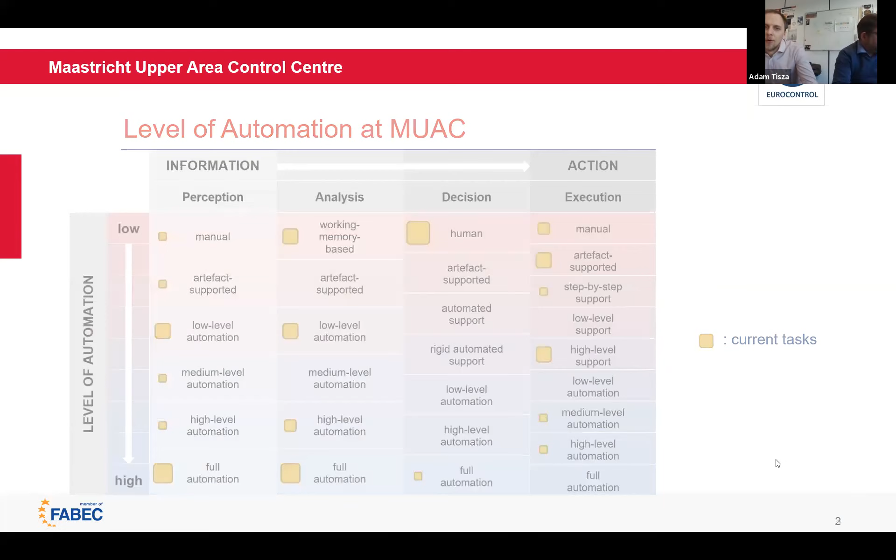So basically there you can see that when it comes to the preparation of decisions, so how we gather information, how we analyze information - think about how the radars work, how the radar plots are represented on the radar view, how conflict detection works. Then you can see that quite many features are there which are highly automated and they support the perception and analysis. However, when it comes to decision making, you can see that we are nowhere near those levels. So that's why the ATCOs say, hey, there's almost nothing that is really automated, because decision making is still completely, almost completely human in ATC.

And then the execution is like a bit more in between. So the next one.

The next question is, how do we want to proceed? We know where we are, where do we want to get to? When thinking about that, you don't want to reinvent the wheel, so you look around at what has happened in other industries. We looked into the flight deck, how features were introduced, how pilot work was automated and the amount of pilots reduced, but also the car industry, because it's very similar. You can see similar things going on right now as car makers introduce more driver assistance systems.

What we realize is that you can follow two different approaches. You can either go a bit blind, without any strategy or systematic approach, and just introduce whatever technology allows you to introduce. That's path A. That's what we quite often see today with cars, and what we could also observe in the flight deck, where automation is completely driven by what can technology offer, what are the possibilities. The problem is that it's not designed to support the human, not designed from a human-centric or system-as-a-whole point of view. It's only technology-centered, and there you can see all the ironies of automation, all the problems and incidents.

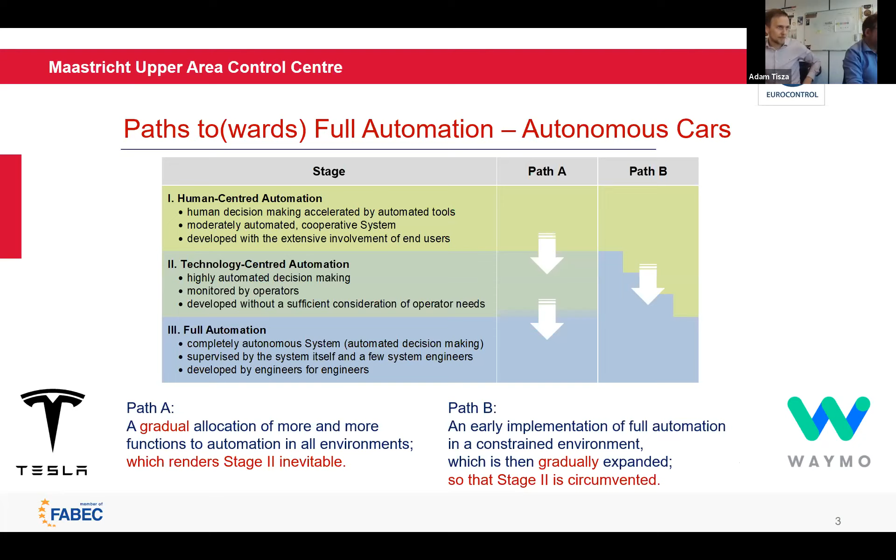So basically, we try to learn from these approaches and apply them to our environment, to ATC. Here is the taxonomy again. We try to define how we can split certain situations, certain scenarios, like the geofenced areas with the cars, in our environment. And we realize we can do something very similar.

If you think about a whole bunch of aircraft in a volume of airspace, you can imagine that not all aircraft are at the same spot at the same time, they don't all interact with each other at the same time. There are certain overflights which are quite often quite segregated. There are some clusters or hotspots, as we often call them, where flights really come together and cross each other's paths, and then you do need to do something about them, and it becomes a complex situation. You can observe these different traffic characteristics within the same airspace, even within the same sector.

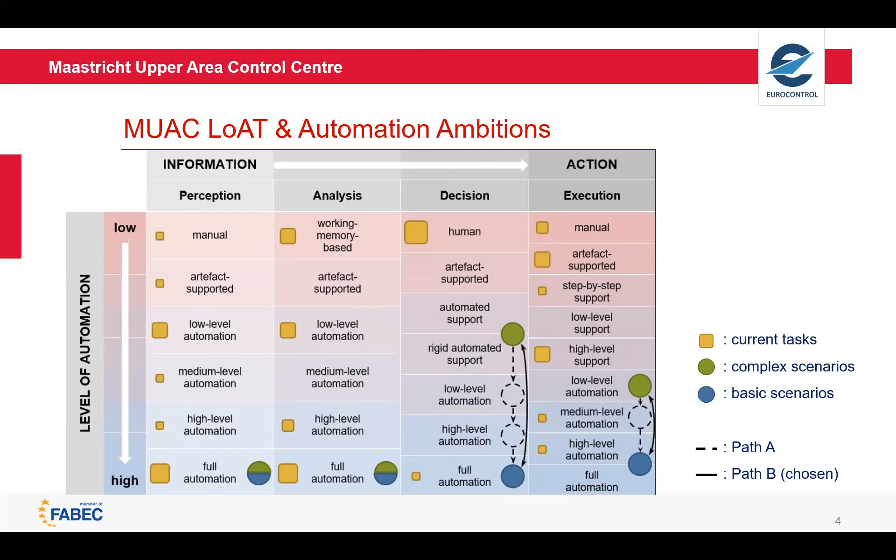We've already observed this happening in the ops room: if you get really busy as an executive controller and you want to focus on your hotspots, on the real challenging complex tasks, you can say to your planner, who usually takes care of coordination and preparation, please help me out - could you take care of those two overflights there? That's of course not going to be lengthy communication in the ops room, so they let each other know very quickly, please take care of those two flights because they are just too much for me, I really want to focus on my core problem. That's what organically developed in the ops room, and that's what we wanted to learn from and surf on as an existing wave.

How about doing the same with automation, where we split basic traffic scenarios and complex traffic scenarios? When it comes to basic scenarios, no-brainer tasks and flights which only pass the airspace mostly on the same level and rarely have any kind of action, we just say let's do it by automation. Let's make sure those flights are taken care of by automation in a way that they don't interact with the more complex traffic of the ATCO.

For the more complex traffic, the green bubbles here, we don't want to go so far with automation. We don't want to create an out-of-the-loop situation. We want to keep the human involved as much as possible, but we do want to support the ATCOs with very high levels of decision-making support. So we want to introduce new intuitive tools which simply show the ATCOs very quickly what the possibilities are, what the constraints are, and then the ATCO is the one who in the end picks the right solution.

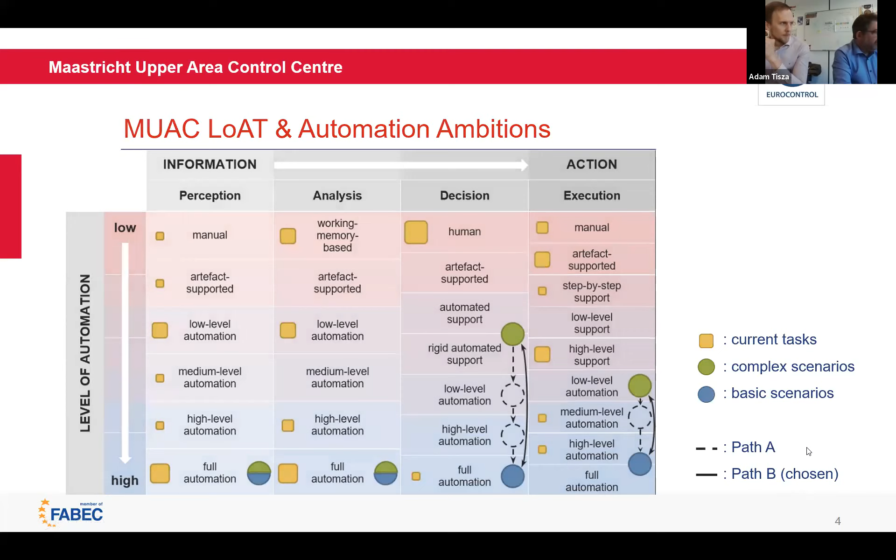So in a nutshell, this is the approach we had. Objective 1 is more about the preparation of traffic, where we would like to achieve very high levels of automation. The other two objectives are that when it comes to complex tactical scenarios, we want to create highly automated decision-making support and execution support tools. But when it comes to basic traffic scenarios, we want to automate the handling of the traffic in those scenarios.

And now the floor is Peter's. Okay.

Beside my job as head of ATM development, I'm also a project manager. I'm a project manager of a project called Argos. The abbreviation was meant to be a real groundbreaking operational system or something, but we invented the name first, and then we said, what can it mean?

The way we approach this project is with the quote that you see here on the screen, as was explained by Adam. We want to let the air traffic controllers really focus on the real challenging work, to do what they are best at, and to leave all the routine work, the basic traffic, to the machine.

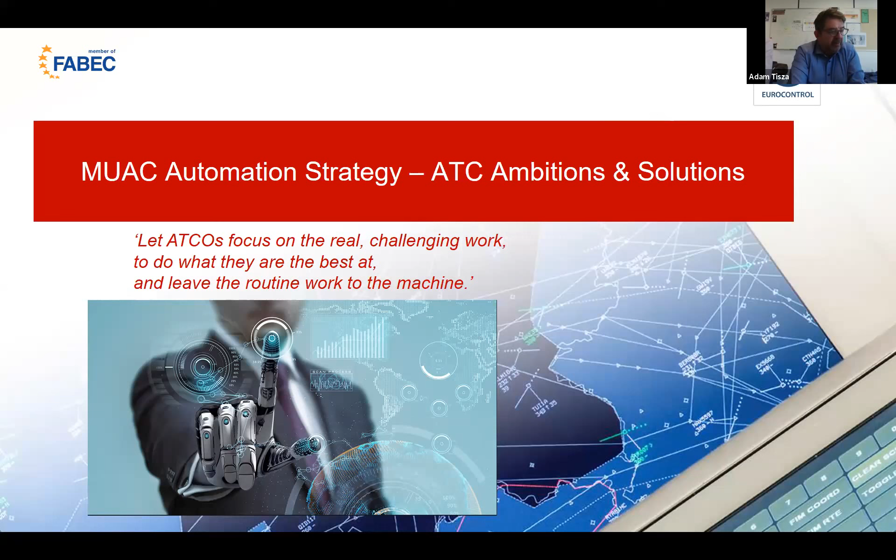Actually, Argos started before the automation strategy was in place, just as an idea that I started working on with my brother, who is one of the software developers here. At dinner once, after a few bottles of wine, we said, let's make a system so that I can do air traffic control at night, because at night we are burning ATCO hours, very expensive ATCO hours, for almost no traffic. So I said, I'll do it. But then I need a system because I don't know how to do ATC.

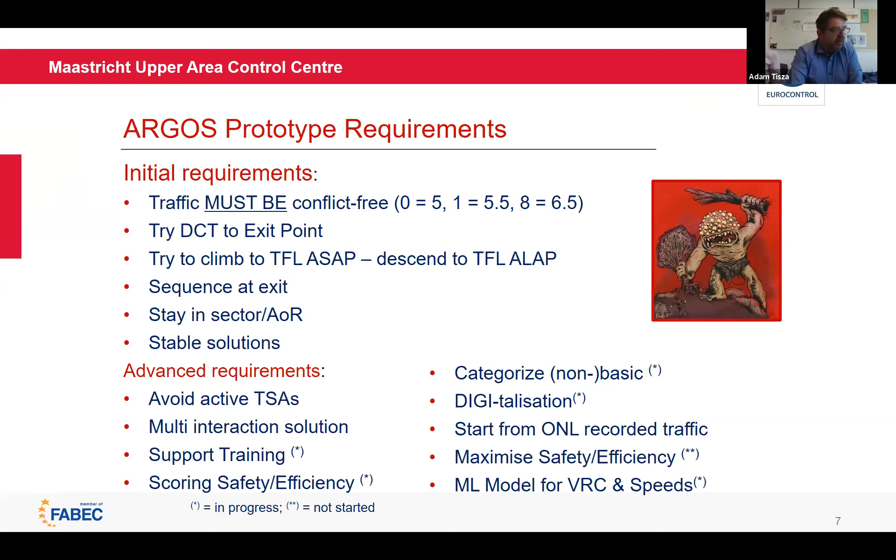In brief, these are the requirements that we put on Argos. The most important requirement, of course, is that the traffic must be conflict-free. You need to respect the exit conditions demanded by the letters of agreement. Of course, you need to avoid military areas, although at night there are not many military areas. Argos is also designed to support training, for example. But I will not dwell on these requirements—this is just what we took on in order to make it work.

What is more important is that when we started designing Argos and talking to the users, we had to define the modus operandi in which Argos would be used in these basic and complex scenarios.

What you see here is that first of all we had level 0 through level 9. Level 0 was that Argos does nothing, and level 9 was that Argos does everything and nobody is around. When we discussed this, we looked into which levels of automation we were going to take, and we selected level 3 and level 8. Level 3 is that for complex traffic, Argos will help—Argos will say, this is what I would do, but it's up to the ATCO to accept what Argos proposes, change it, or modify the plan that is presented.

If it's a CPDLC flight and the plan was approved by the ATCO, Argos will execute the plan. At the right moment, it will give a little warning to the ATCO saying, I'm going to uplink this in 5 seconds, and then Argos will do it. There is no voice involved. If it's a non-CPDLC flight, Argos will have a pop-up saying you should clear this flight as you agreed with my plan before.

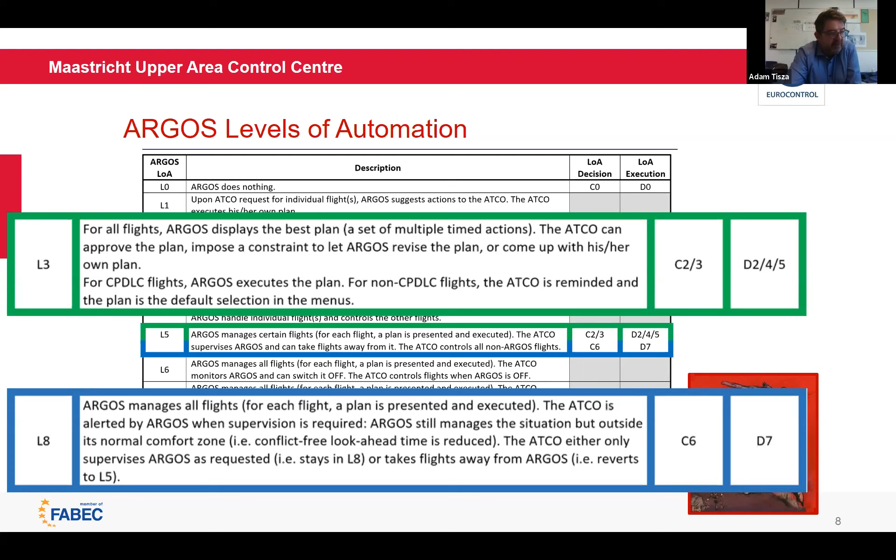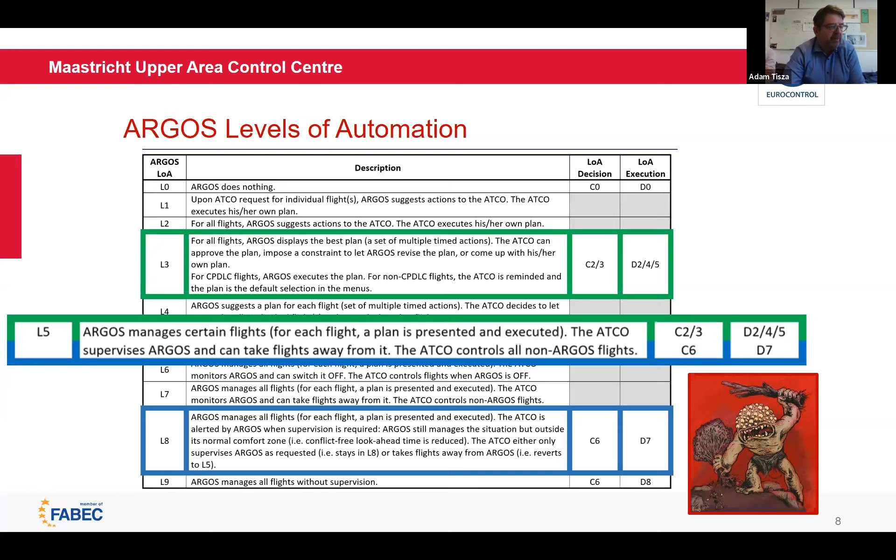We end up, when the ATCO says okay, I'm taking over this flight, imagine there is a loss of CPDLC, which happens. Then the ATCO will say okay, I'll have to handle this flight because I have to do it verbally. And then we're in this mixed mode level between level 3 and level 8, which is level 5, where Argos is managing certain flights, but the ATCO is managing other flights. It's a mixed level. It's going to be maybe the most complex level to develop.

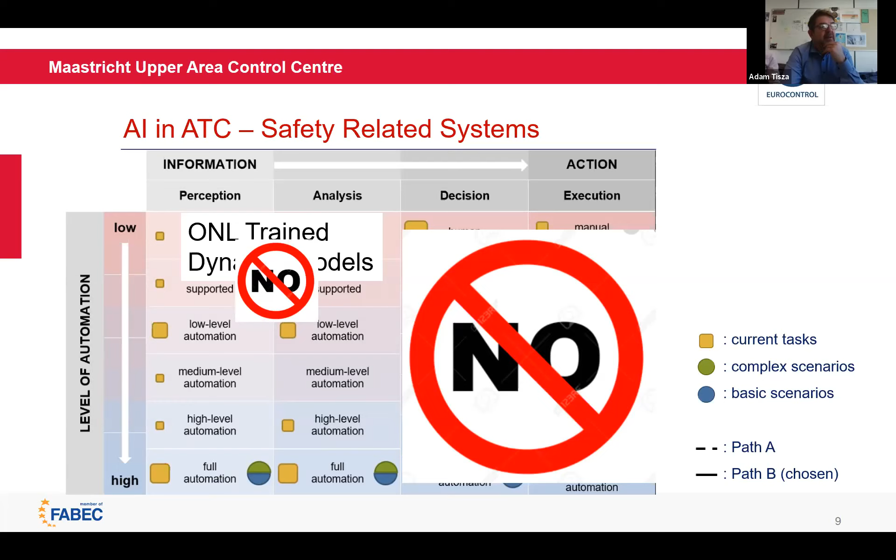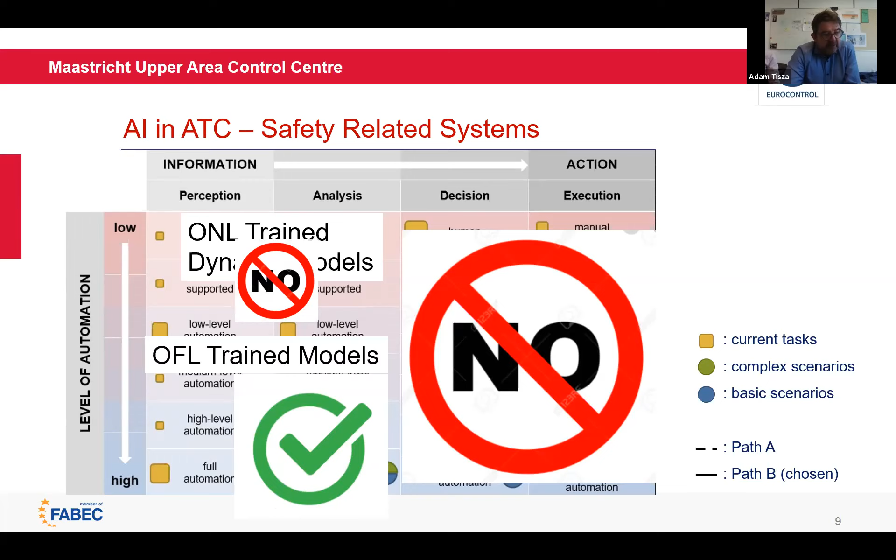In AI, you can have machine learned models that are static while being used, or that are dynamic. You can have a model trained offline, but then the model enhances itself while running online, which is called a dynamic model. Also here we say this is a no-go for safety-related systems. The only thing we are looking at now for artificial intelligence in ATC is an offline trained model that is static. So you train the model offline, you know how it behaves, and then you can use it in the online environment, in real time, but it will not change anymore.

What we have in mind for Argos is that the vertical rate of change and the speed will be derived from a machine learned, offline trained model, and used in Argos to calculate the trajectories more accurately. That model will give the vertical rate of change and speed as a function of the aircraft type, the operator, ADES, temperature, and so on.

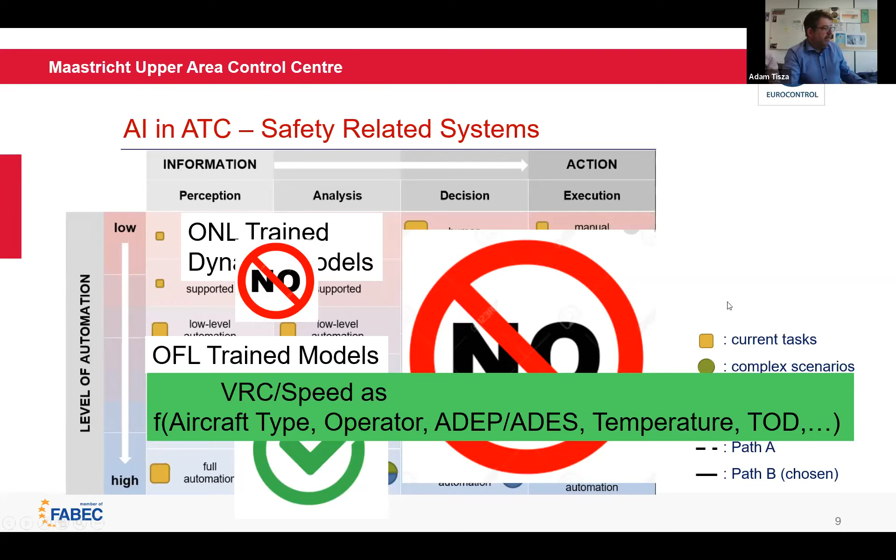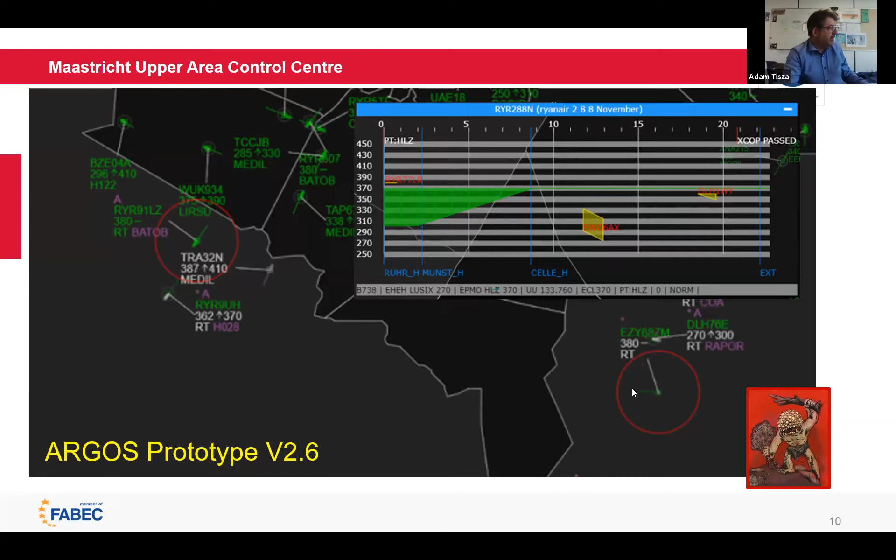A question we often get is, why are you doing this? The main reason is to offload the ATCO work to the computer, so that there is less boring routine work. By doing that, we hope there is less stress, traffic will rise so there is more support but less stress, although the traffic is rising, and that the ATCO can focus on the complex tasks.

Okay, the next bullet is a bit teasing. Maybe we will build a machine at the end that is more performant. We can think about green flights where the sequence of clearances will become so complex because of the engine type or the type of fuel used, which goes beyond the capacity of a human to make the best plan. And there the machine maybe could do a little bit better.

We're also doing it to give more time to the ATCOs to be in the sim. So as I mentioned, they're spending their night being bored. If that time could be used during the day for training special occurrences, that's actually what we think is a better thing to do.

Argos can also do support in training. Today, if you want to train an ATCO, you need a few other ATCOs around him who are feeding that ATCO with the traffic in the right way, and there Argos could take over. We want to be the first in the world doing this kind of thing.

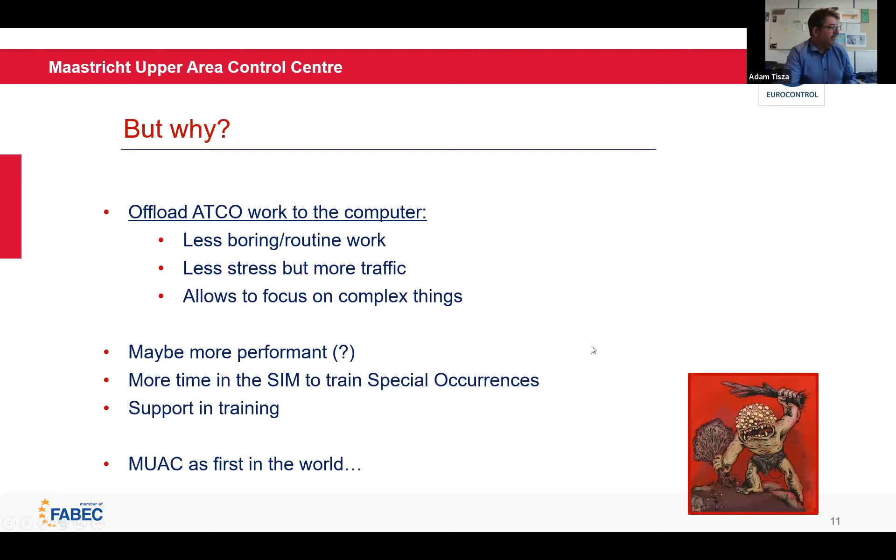How do our ATCOs perceive what we're doing? Actually, quite positive. We have involved the ATCOs from the onset. Automation is, of course, a subject that is being heavily discussed now and happening around us everywhere. As was mentioned, the car industry, automation in cars is affecting all of us. And we clearly tell the ATCOs, this is not a threat for your job.

We have no ambition to build a system that is able to handle complex traffic. We even think we cannot do it today. There are too many unknowns. Well, there are pilots here, there are too many other people in the loop to make this fully automated at this stage. So we don't have that ambition anyway.

In the ATCO refresher training this winter, there is a whole topic dedicated to automation and artificial intelligence. I mentioned COVID here because actually it's one of the few positive things it brought. During COVID, ATCOs who knew we were building this automated system were actually saying, where is it now? Because I'm really bored. We were opening sectors just to make sure people had enough hours on position, but there was no traffic or reason to open those sectors.

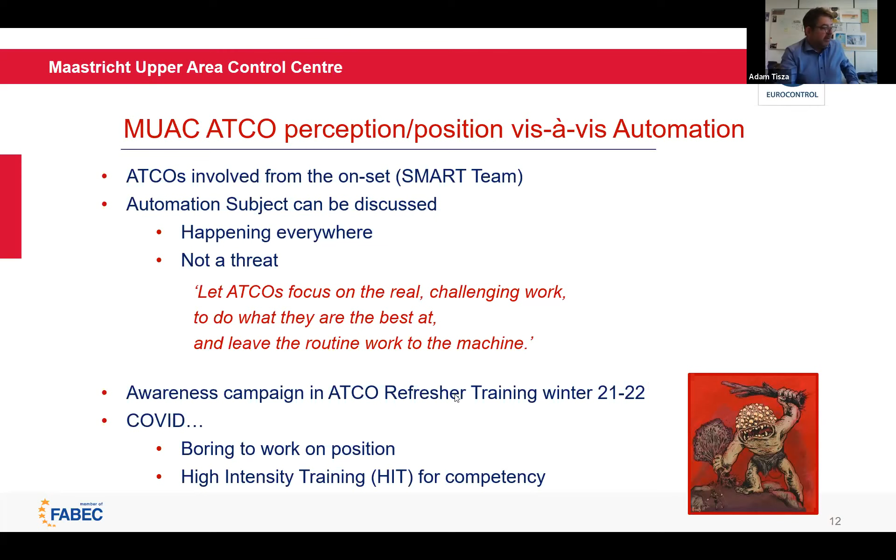Also, during COVID, in order to keep the ATCOs proficient, we actually had high intensity trainings to assure their competency, and this came after we announced Argos. In Argos, when we announced it, we said we want to take away the boring work and give you more training, high intensity training. And then it actually came with COVID by itself, but unfortunately Argos was not yet ready.

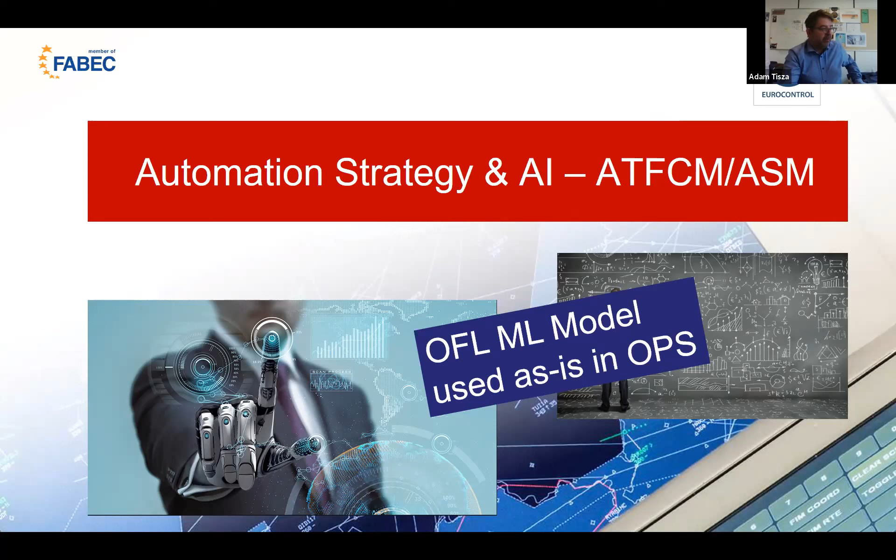Okay, we also use AI in the flow area, so not in ATC but in ATFCM and airspace management. And there again we use offline trained models that are not modifying themselves during operation. I have a few examples of what is currently being used.

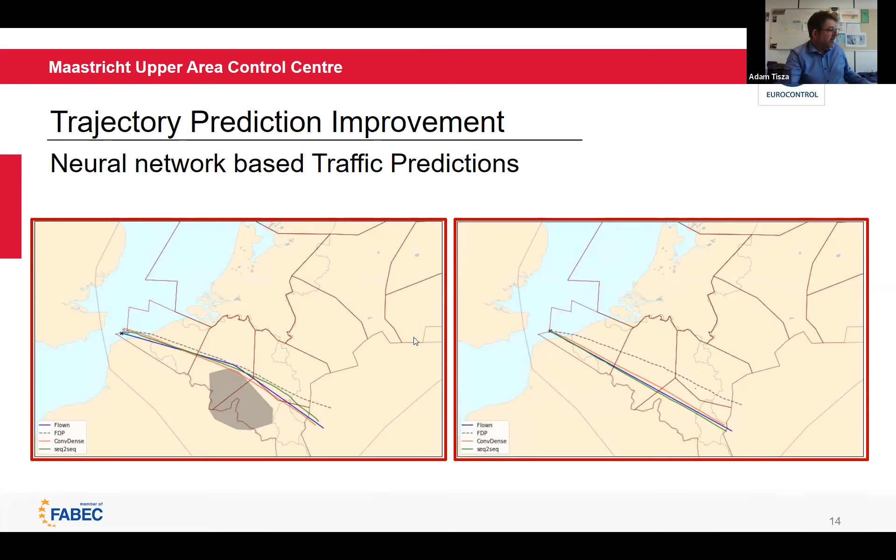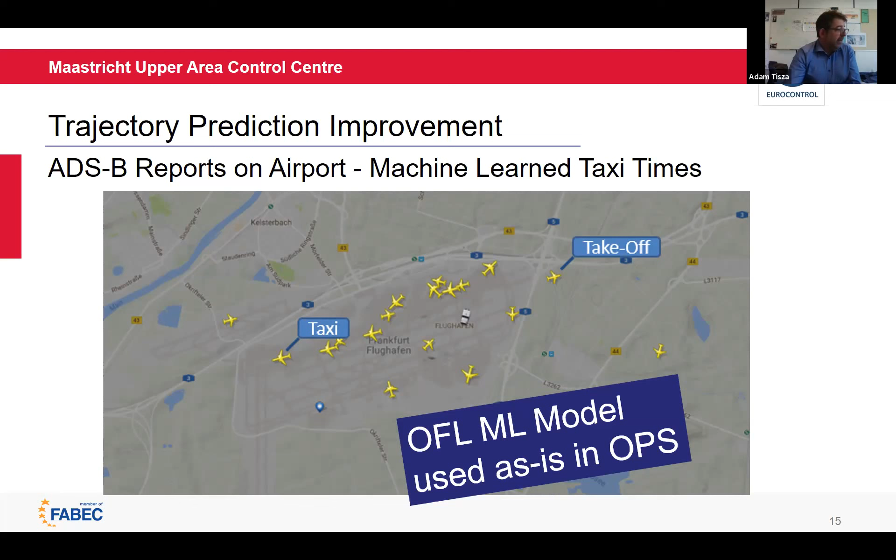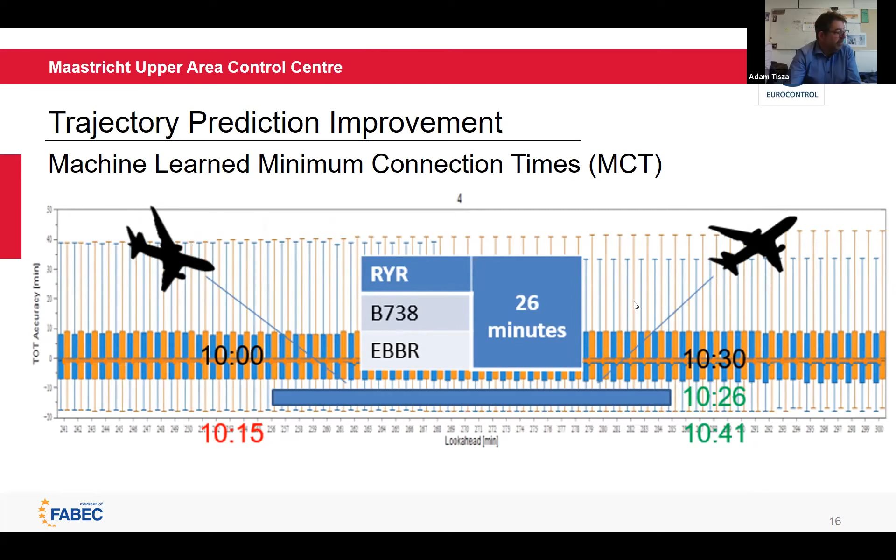Another machine learned model is the minimum connection time. Based on the airport, the operator, and the aircraft type, you can learn from data that there is a minimum connection time. So a Boeing 738 Ryanair in Brussels will at least be 26 minutes on the ground before departing again. We have that from looking at big data. Now if the Ryanair is landing at 10:15 and that same airframe is planned to leave again at 10:30, we know that this is not possible. The minimum turnaround time is 26 minutes, so it will not leave before 10:41. Again, there we update the timings and get better predictions for flow management.

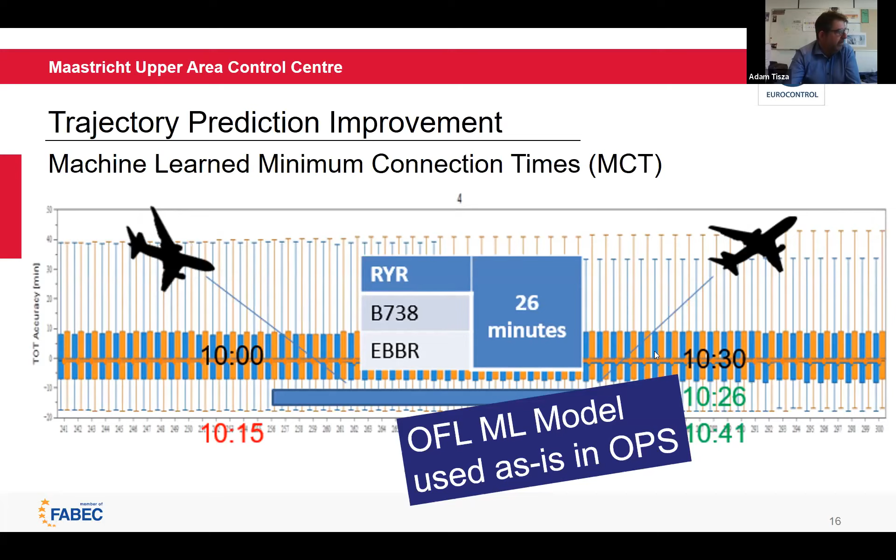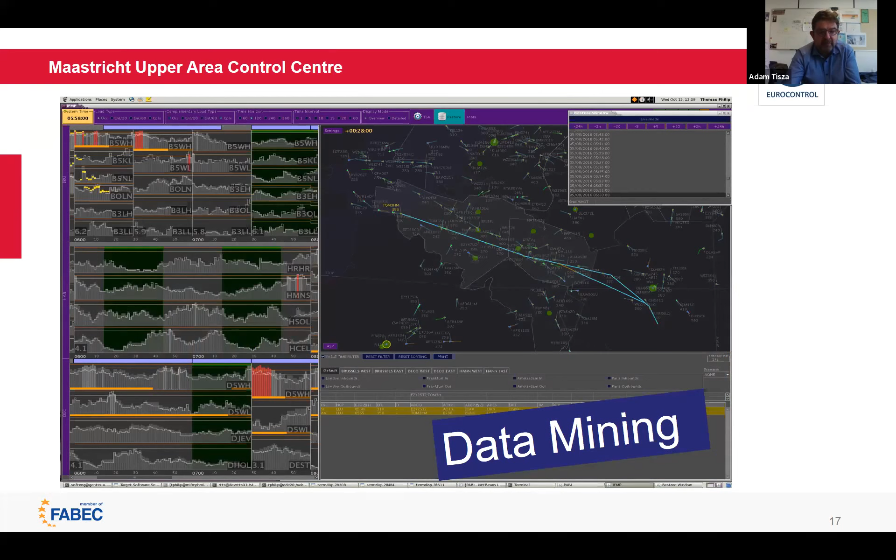And that's the end of the presentation.

So, Mike, that was it. Back to you. Already a question.

Thank you very much indeed, Adam and Peter. That was really interesting discussion to see where this stuff is all headed, and good to know that it's still being thought of over a good dinner at your brother's.

I'll just ask a question to kick off. As a pilot coming out of, for example, Heathrow and going down to the Middle East, this is at a much more basic level, but when I come into Maastricht airspace, I probably spend the first 10 minutes climbing to the planned cruising level. I'll be cleared direct to the exit point, maybe in the Wien FIR. How much work does that involve for a controller, that flight on its own? What proportion of the work is occupied with that flight?

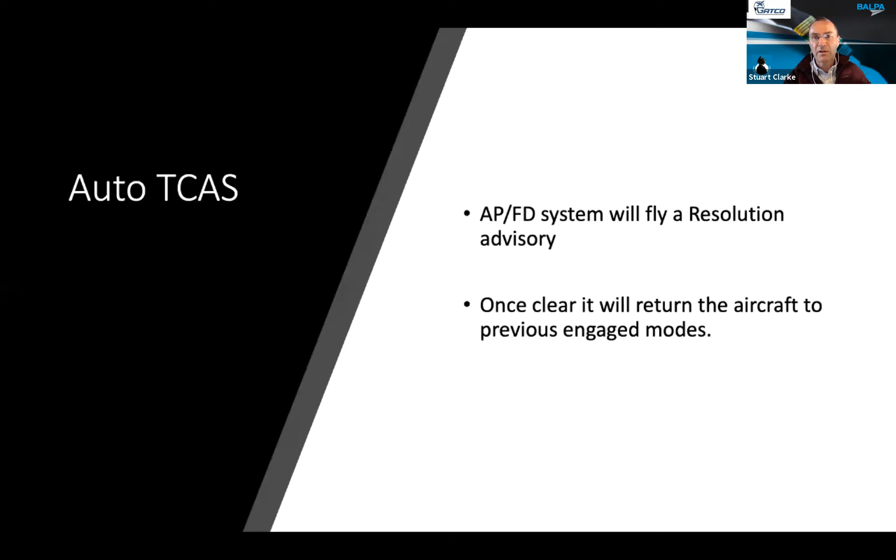The first thing we're going to talk about is auto TCAS, a quick overview. We all know what TCAS is, and that there are procedures pilots carry out in order to avoid airprox situations. But on the modern Airbus aircraft, the A380, when I flew it a few years ago, that had this auto TCAS, and it will fly an automatic avoidance routine and then return itself to its previous assigned clearance. So just a quick overview of how this looks and how it pans out for the pilot who's aware of what's going on but monitoring.

The idea here is - I hope you can give me a thumbs up if you can see my cursor on screen.

Right, yeah, brilliant, great stuff.

So what we've got here is an A350 trundling along, and there's a big old A380 coming in the opposite direction. At the moment, these are the mode selections—this is what the pilot will see at the top of his or her primary flight display. As soon as there's a traffic alert, the aircraft arms this TCAS mode in blue, and the pilots will talk to each other and confirm they've spotted the traffic.

When the resolution advisory occurs, the aircraft engages its TCAS mode, so it's now active. You can see it pitches itself up, and this vertical speed indication pops up into this green band, which is like the target to avoid. It will climb up over the conflicting traffic.

Then, as clear of conflict is announced, the target aircraft has passed, it will engage a minus 1,000 feet per minute rate of descent and descend back to its original assigned altitude, shown in blue, capturing that green altitude and trundling along. In theory, all of this occurs without any pilot intervention whatsoever, although they will be there monitoring.

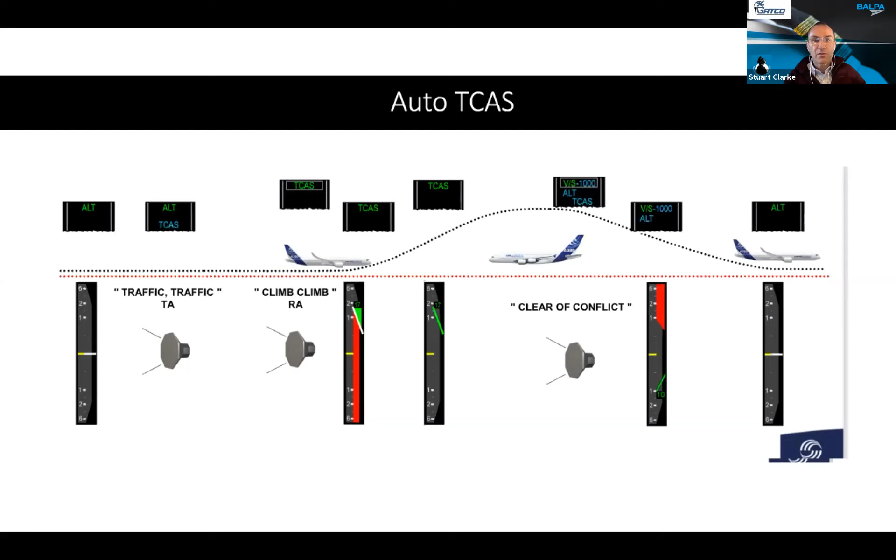So this wasn't something I was aware of, but automatic emergency descent. The scenario is that both pilots are incapacitated due to explosive decompression, and the aircraft will sense those conditions itself. It will look at the cabin altitude, predict that it's going to exceed its 14,000 feet threshold, and then actually engage emergency descent of its own volition.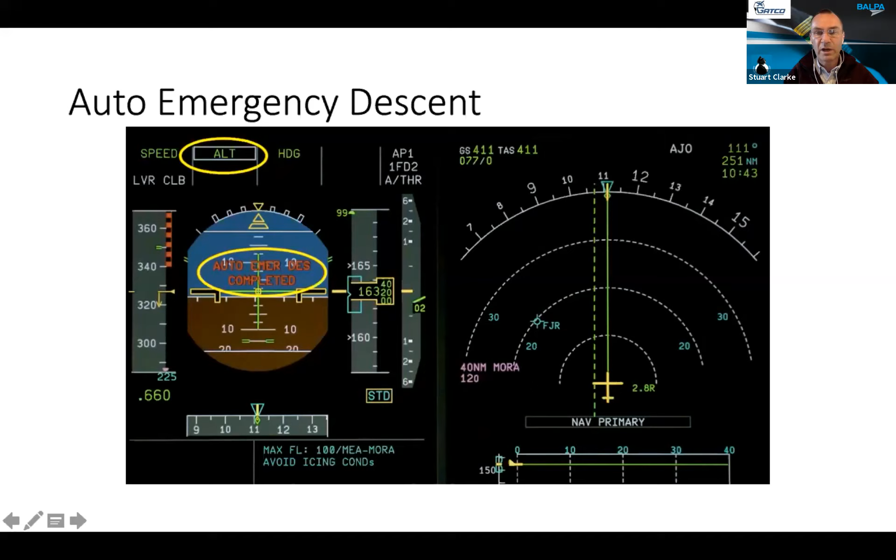Finally, it's now got down to whatever level has been set—in this case flight level 163, relating to the en route altitude plus a bit of margin. It's slowing down, as we can see, to 225 knots, which is probably what we'd call in the Airbus a green dot speed, like the best lift-to-drag. It will cruise along now in heading mode at that height, at this low speed.

So you've got a safe position, even if both pilots have been incapacitated.

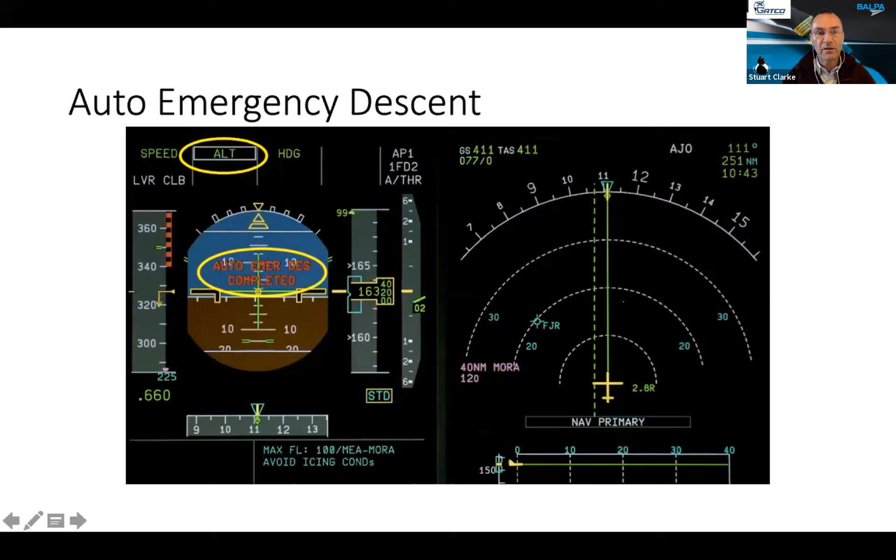Finally, another one of interest to air traffic controllers when we've chatted about it—this was on the A380 as well, and I understand it's on the A350 and other aircraft are benefiting from it too. It's called brake to vacate.

Instead of pilots after landing applying their brakes manually or pre-selecting an auto brake mode commensurate with the level of deceleration they wish, whether it's a short runway, a long runway, or whatever the runway surface conditions are, in these aeroplanes you're able to specify which turn-off you wish to come off at, and that can be done in collaboration with air traffic control.

One of the benefits of this, shown on the screen there, is massively reduced brake wear, because the aircraft will only apply enough brake to come to a low speed adjacent to the turn-off position selected by the pilots, in theory. So there are cost benefits, and there are passenger comfort benefits.

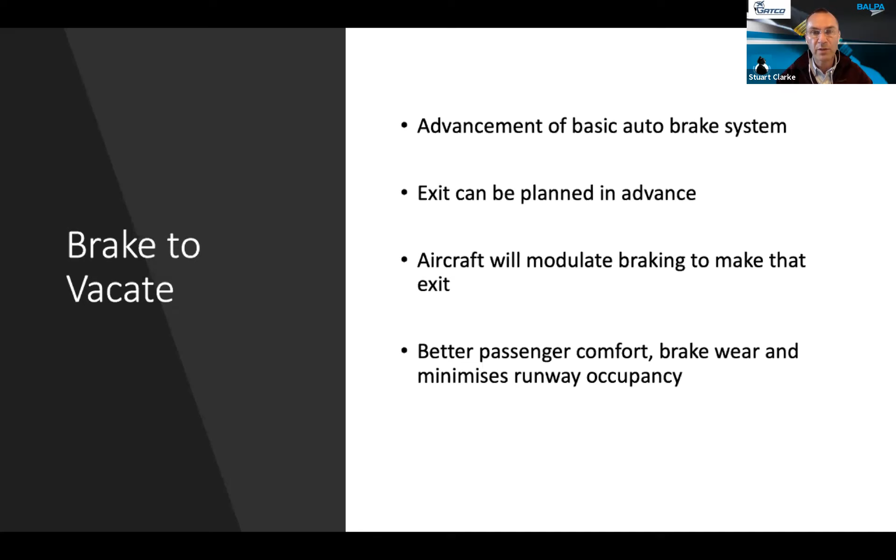Here's a little overview. This is now the map, so this is the nav display. And what you can do is zoom right in on the airfield, and you can see a demonstration or a picture of what the airfield looks like. And you can see through interaction with the flight management computer side of the aircraft, you can actually select which exit you've been told by air traffic control, perhaps, that you're going to be able to use.

On touchdown, the aircraft will apply the brakes to test the surface condition, and then it will subsequently apply the braking in order to bring the aircraft to a low speed at the right point.

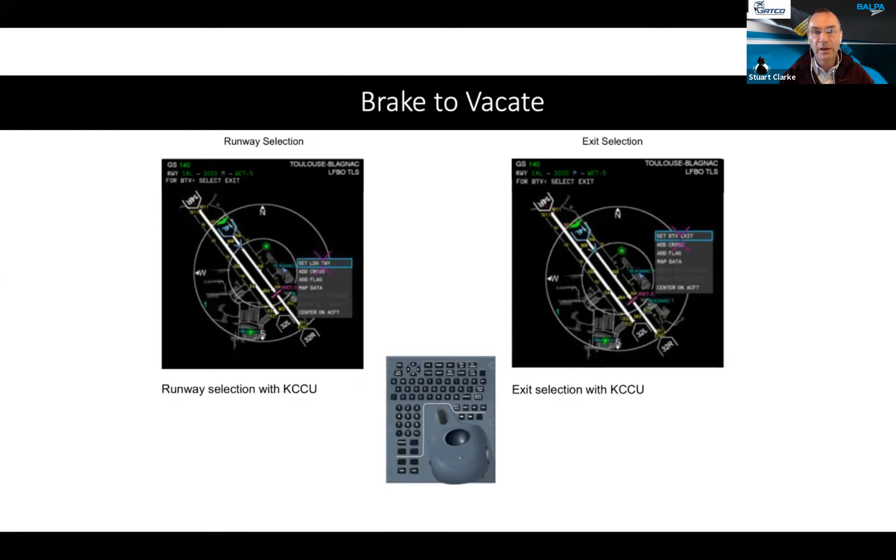So on the one hand, that all sounds great. And none of this is AI, of course. This is just really sort of automation, although it's pretty enhanced automation. But nonetheless, we know that there are issues around automation, aren't there? Training, knowledge of failures, safety procedure, and all that kind of thing. So these are the issues that we have to think about, the training issues of these enhanced systems.

Hopefully that little overview there of some of the things that are available to pilots now will be of interest to the air traffic controllers as well.

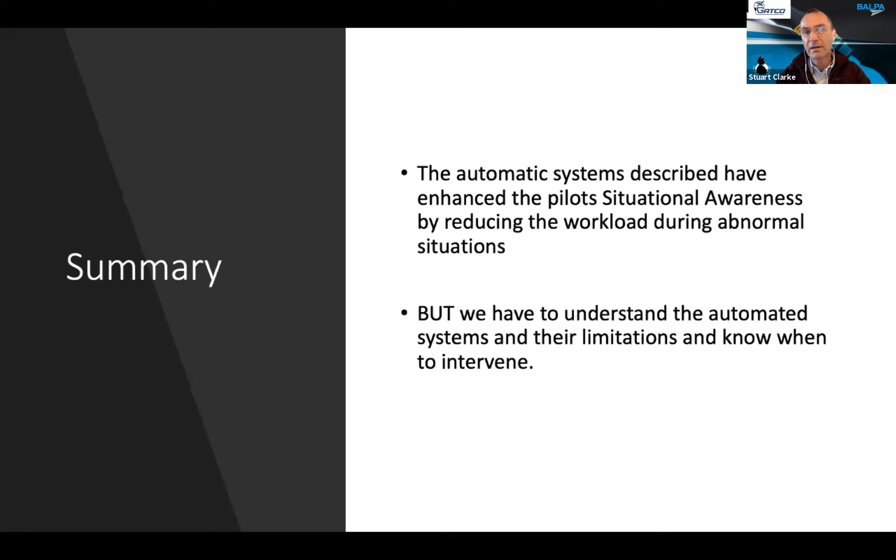Questions that typically come up about it are: can you change the selected intersection if you want to come off earlier or later? A little bit like many issues, early knowledge is good, and you don't really want to be programming the FMS at a very late stage during the final approach.

What if the runway surface conditions aren't as good as they ought to be? Or if you land a bit deeply, well, can the pilots intervene? Well, yes, because they just go through onto a manual brake application and fly the aircraft or brake the aircraft in the way they always have done in time-honored manual fashion.

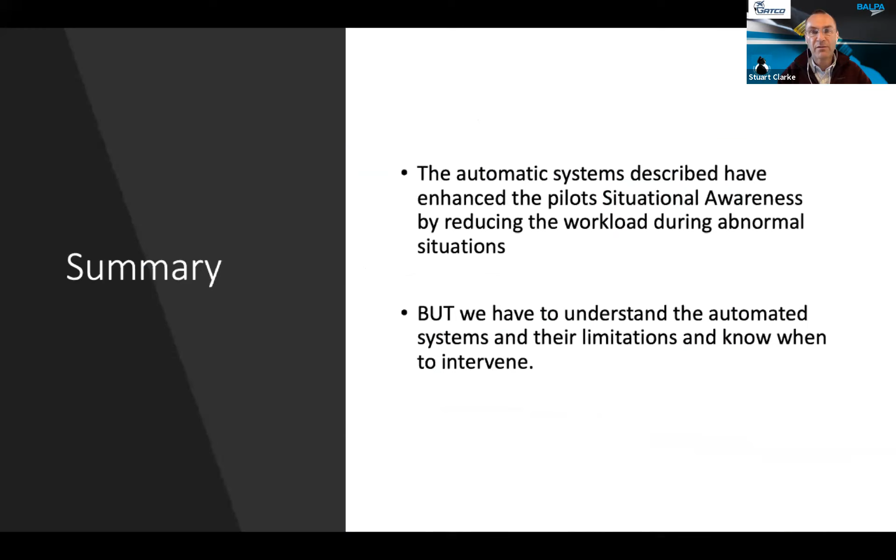So that's a little bit of an overview. I'm going to go back to that slide in a moment. I'll stop sharing the screen at this point. So that's my little overview, which is a very non-technical skim through what my colleague was going to give you a more technical explanation of.

I wonder now, Mike, we've got a couple of questions up there, and we can proceed with some Q&A as well, and discussion around the issues of automation, perhaps.

Yeah, absolutely. Yeah, thank you, Stu, for going through that. That's brilliant. And I know it was tricky, as you're an A380 man and hadn't progressed as far as the 350, or it hadn't even come out, I don't think, when you were flying the A380.

Olivia just asked a question that you may or may not be able to answer. For the auto emergency descent, will that take into account minimum sector safety altitudes, or will the explosive decompression take precedence, as that could lead to additional problems in mountainous terrain areas or areas with restricted or danger areas activated?

So with the caveats as before, that this isn't my specialist subject, but my understanding is that the aircraft's got these minimum en route altitudes, and so what it will do is select some sensible minimum plus a margin, or 10,000 feet, whichever is the higher. So it's not going to go hammering down into Mont Blanc.

I think one of the areas where it does need that level of supervision, my understanding is that if the minimum en route altitude in your little bit of terrain under the aeroplane right now is quite low, but you've got high ground coming up, I don't believe that it's now going to do anything about that. It's going to fly along straight and level until, well, probably the next thing you're going to find out is a GPWS warning going off. Now, I might be wrong about that, but that's my understanding.

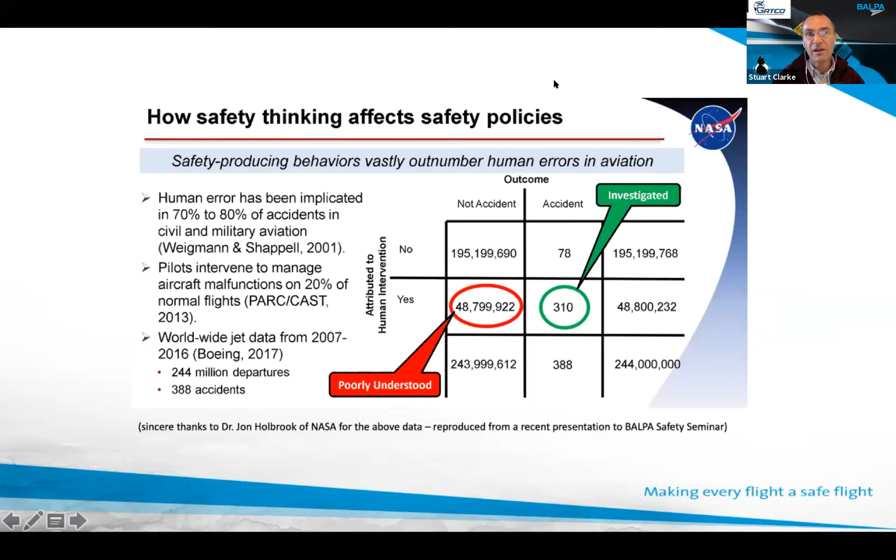I think that's something that, outside of the problem that BALPA has, other organizations like us face too: when making safety arguments like this, they're often categorized as, well, you would say that, wouldn't you? Because you're pilots and you don't want to see self-flying air taxis and what have you. We're not fundamentally opposed to technology, but nobody truly addresses the benefit the human brings.

The extreme example is the Sullenberger case. Had that been in 20 years' time, with an autonomous A320 taking off out of LaGuardia, double engine failure at 3,500 feet, would the automatics, would the machine learning over that time, would the AI have had sufficient capacity to bring it to the successful conclusion that he did, putting it down on the river safely? I obviously don't know the answer, but I've got a pretty good idea. I don't think it would have been as good an outcome.

Excellent, Stu. Any thoughts on that, Peter? Yeah, we don't have the ambition to replace the ATCO. We don't have this ambition.

I don't even have that capability for the moment, because of those situations that are complex, where a pilot does not react immediately and then there's a wind that's unexpected. Then you need a human, and the human will take care of it. And we fully acknowledge this.